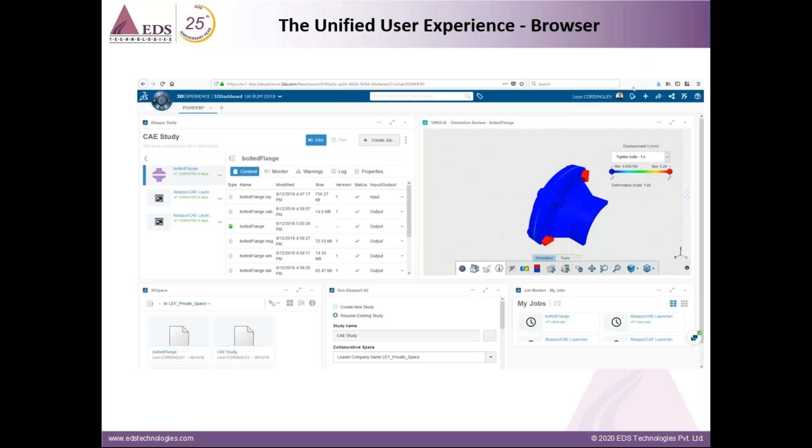So this is how the unified browser is going to look like. Either you can launch it through the 3D Experience which is installed on your laptop, or you can use the browser application as well to log in and build your models and submit it for the analysis. So that's how easy and simple it has been made.

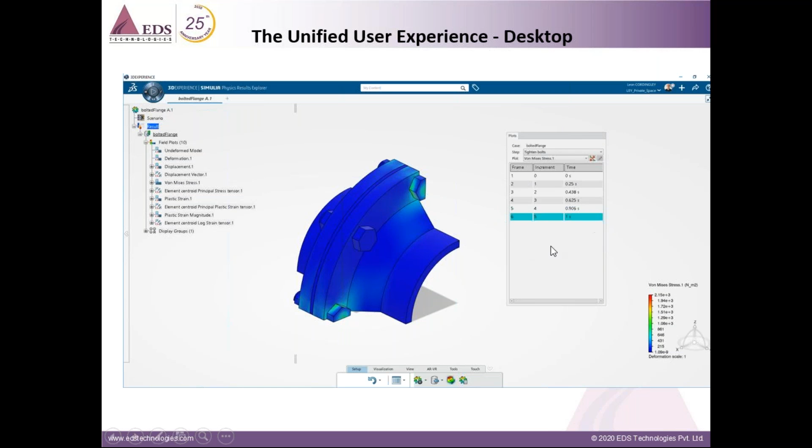So once I go into a particular application, this is what the user interface is going to look like. And like I mentioned, you will see the model tree on the left hand side, a toolbar at the bottom, the search bar and tags on the top, as well as this table you are seeing. This is the intuitive tabular table that allows the user to perform his duty without making any errors.

Now, what is my role in all of this? Like, okay, I am a simulation engineer, true, but I am working only in a particular department for a particular kind of analysis. So what is my role in all of this? Basically, one of the most important points here is functionality is provided through roles.

We do know that every organization has different kinds of specialists. So based on their experience and specialization, we can assign different roles to those particular engineers. If I'm a mechanical analyst, or a simulation specialist, I have a mechanical analyst role that can be assigned to me. For a designer who is building a design and quickly wants to validate if his design is good, a stress engineer role can be assigned. For a composite specific engineer, we can assign composite simulation engineer. Then there is additive manufacturing researcher, plastic injection engineer, and many more roles are available. And at the end of the session, we'll briefly talk about structural analysis engineer, which is a full Abaqus capability role, and we will definitely focus on this role shortly.

Now, each role here describes a typical user's profile, and it provides the capabilities and all the tools for them to do their job. And not only that, users can have one role or a combination of roles, and you can assign as many roles as you can. And one more good thing here is you can assign an administration to the platform, and all the roles will then be assigned by this platform admin. And all these roles are accessed via the compass, which I previously talked about.

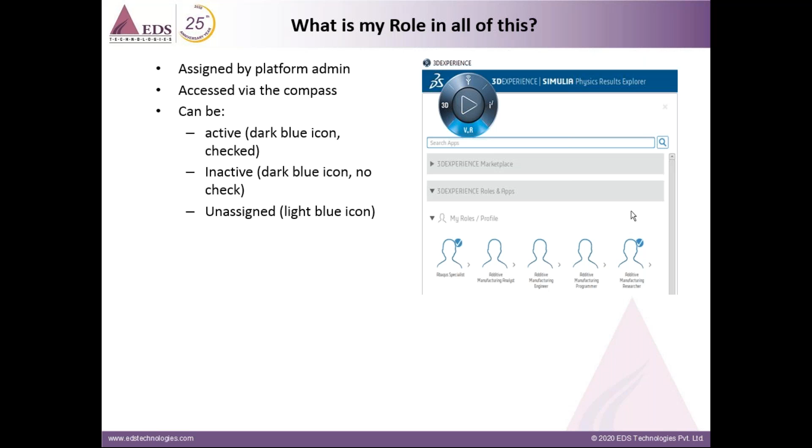So V plus R is for simulation. When I go to 3D, these are all for the CATIA or the 3D product design roles. And again, roles are packages of applications. So inside the roles, you will have different applications, again very specific to the role that has been assigned.

And it's the 3D dashboard. It's your one-stop shop for 3D experience. You can access any and all apps from different brands using the same widget. So it makes the job easier. I don't have to keep moving from one GUI to a different GUI, or start firing up different softwares, so that you can have control. Everything can be accessed from a single widget.

Not only that, you can open up different widgets and interact by using drag and drop. On top of that, you can create your own personalized interface as per your needs. So if you're working, you have a certain workflow which you'll be working day in and day out, say for the next 6 months or 1 year. You can create your own personalized interface which will aid you to fasten your process. A multiple dashboard again makes it easy to switch between different tasks as well as roles.

Now coming to value proposition, first of all we have state-of-the-art multiphysics simulation capability which can deliver structural analysis, fluid analysis, acoustics analysis, electromagnetics, multi-body simulation, all brought onto a single platform. On top of that, we have very high advanced capabilities for pre and post processing as compared to the standalone Abaqus CAE. The meshing algorithms, the load constraints, all these algorithms have been highly strengthened and enhanced as compared to the standalone Abaqus CAE.

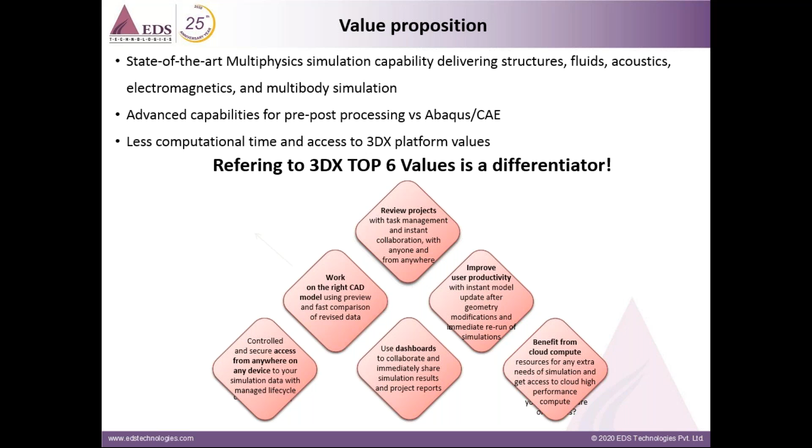Again, I will speak about different types of compute availability within Dassault Systèmes, wherein if I just need very high performance computing for one project which is going to take 10 hours, I don't have to spend a lot of money to buy tokens. Rather, I can buy credits which will be good enough for 10 hours with a very high computing, high performance compute power. So all these different variations of capabilities are available.

Now, coming to another value proposition, the cloud compute example or the turnaround time. As you can see on my screen, there are some examples of the analysis types with the model size, and we have also mentioned the turnaround time when using local compute, meaning hardware compute, as well as the turnaround time for cloud compute.

For wire crimping, a dynamic explicit analysis which involves contact, the model size is about 84 MB, with about 84,000 nodes and 258,000 degrees of freedom. If I use local compute with a minimum amount of cores, that is one core, it's going to take about 26 minutes to complete the job. Whereas if I go with cloud compute, it's going to save me about 5 minutes.

Similarly, for frontal crash dynamic explicit analysis, the local compute is going to take about 204 minutes, whereas the cloud compute is going to take about 178 minutes.

Now, engine thermal stress implicit analysis with minimum local compute is not possible on a single core. Whereas with the minimum compute on cloud, it's going to take about 120 minutes to finish the engine thermal stress analysis, which is an implicit analysis.

For engine sealing and bore distortion, it's around 429 minutes as compared to 343 minutes when using local compute.

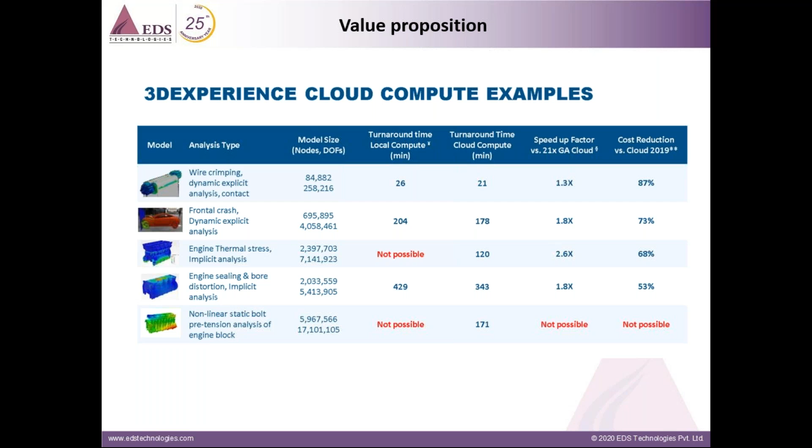So these are some more examples, especially for Abaqus. Be it examples like stent expansion, sheet metal forming, bottle drop, reactor vessel, bolt load, internal pressure, bolt pretension, airbag inflation - this is where we can see the difference in number of cores used on the cloud, and the time the cloud compute takes to complete this analysis.

So for all the small kind of jobs on cloud, a minimum of 18 cores is available by default - you cannot go less than 18 cores. Whereas for medium size jobs, somewhere between 4 million to 8 million degrees of freedom, you get 36 cores by default. And for any models beyond 8 million degrees of freedom, you can go all the way up to 144 cores depending on your requirement and the kind of analysis you are going to run.

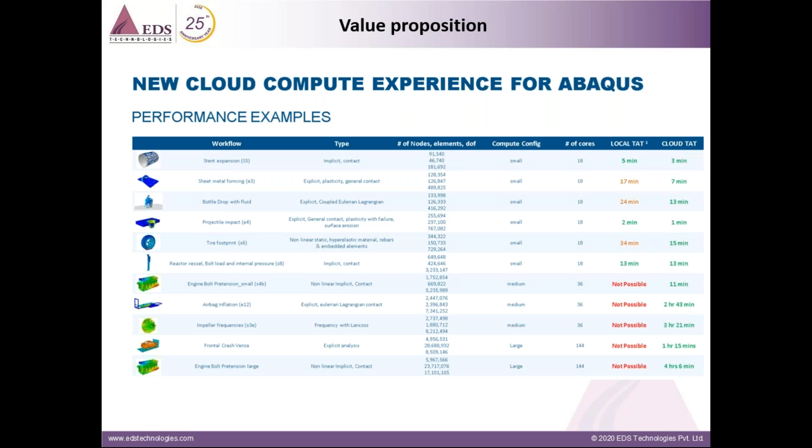So this is the difference when running local compute as compared to cloud compute. Now, this is one small example of how I am going to build a model, or rather pre-process a model, and submit it for analysis. This is a very quick video.

So you have the import option, you can go ahead and import a CAD model.

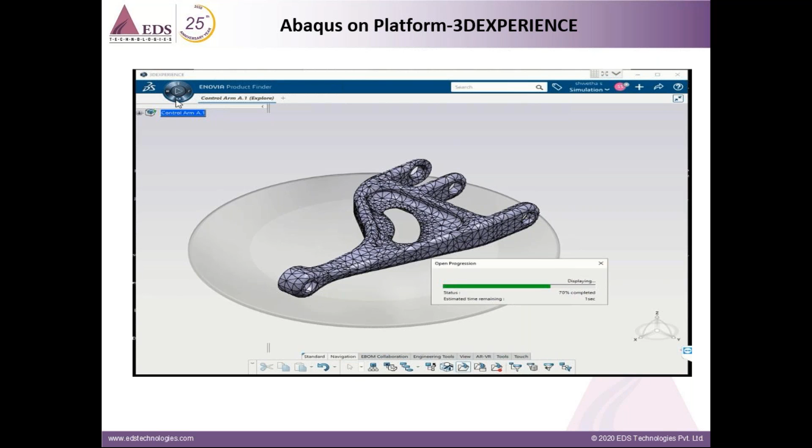And you have all the meshing algorithms just like in Abaqus, and you can see at the bottom we have different tools for modifying these changes. Now you see how we went to V plus R, and I'm choosing a structural model application.

Now once I click OK after choosing, it automatically takes me to that particular application wherein the model tree is highlighted. You have properties, you can go ahead and assign a material. You can either create a material, or if you want certain materials saved, you also have a material palette where you can save your materials once created.

So you can input all your values, you can apply, you can choose the domain, especially what kind of simulation you are carrying out, be it mechanical, thermal, or frequency. All those domains can be easily assigned.

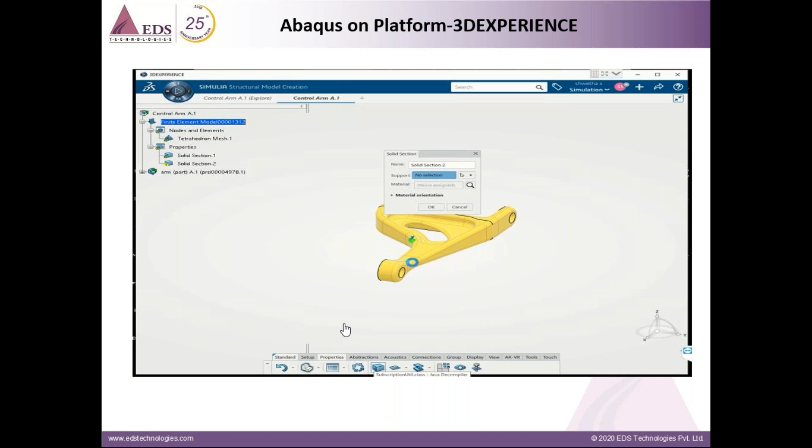So I'm choosing a structural kind of analysis here. Now, once I choose that, you can see how the bottom tools have already changed. So I have a procedure. I can go ahead and create initial conditions, the interactions, the restraints, the loads, and finally, when everything is done, you can simulate it.

Now you can see just above the tools, it says structural analysis case, and before this previous step, the static perturbation step has been created as a procedure. When I click on this arrow, this is the intuitive tab I was talking about. So the setup, the parts, connections, and interactions have all been properly done, hence highlighted in green check mark and square boxes, whereas restraints, load, simulate, and results have not been done yet completely, and that is why those are highlighted in red circle marks.

So now I'm going to the restraints to create a boundary condition. I'm going to fix one side of this particular arm, where we call it a clamp. That is encastre, as we say it in Abaqus, wherein we are restraining all the 6 degrees of freedom. Now you can see the restraints, the green check mark is there.

Now the next step would be to assign the loads. So I'm choosing a face and I'm going to assign the load. I'm going to simply assign a pressure load, or you can even assign force. There are different types of loads available; as per your requirement, you can go ahead and assign. I'm going to assign it on the top surface of this arm.

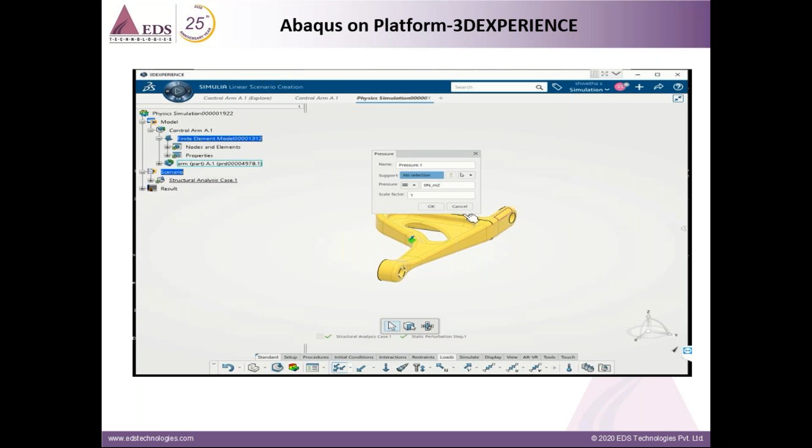So I'm choosing those surfaces, and I apply about 10 Newton per meter square, and okay.

And then we go back to the intuitive tab, and now you can see everything is checked in green mark except the results, because we still haven't done the simulation. So I'm going to submit this job, or rather simulate it.

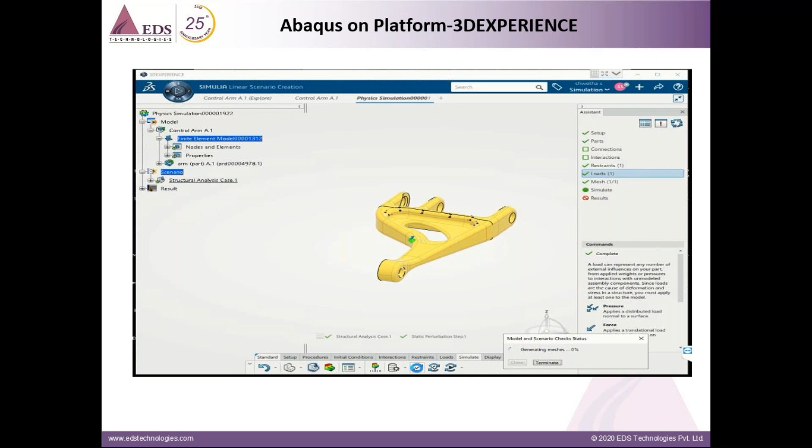So the job is running now. You can see if there are any errors or warnings, they will all be displayed over here. It will take a few moments to finish the results.

And then once the simulation is completed and done, we can go ahead and visualize. So I'll quickly move this.

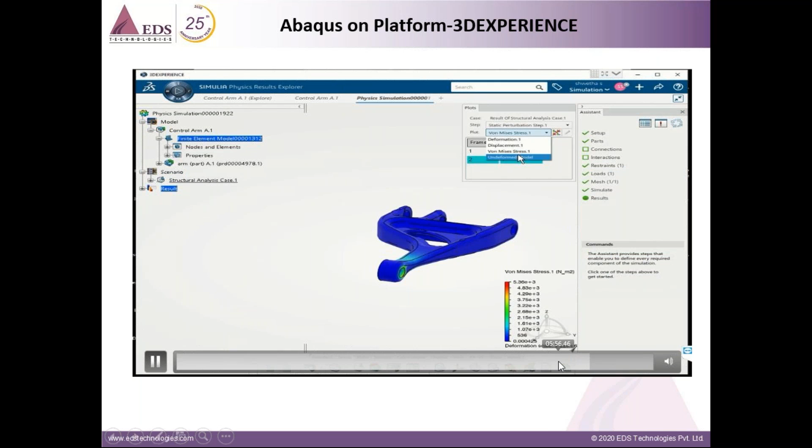So this is the visualization window, and you can see, you can check for your von Mises displacement, undeformed, deformed state, etc. You can have cut views. We will look into the visualization tool in more detail in the upcoming slides.

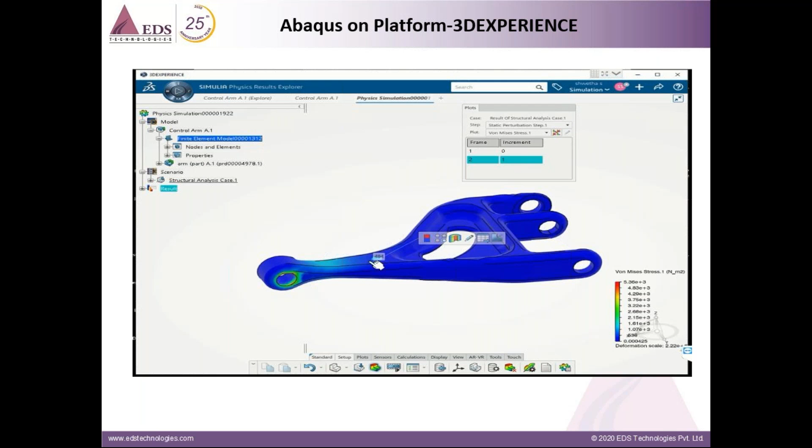So in short, this is the procedure wherein I can import a CAD model onto the 3D Experience platform, use the available tools to toggle from one task to another very quickly. We can build the models, mesh it, and submit it as seen over here.

So I'll move on to the next slide. Coming to the visualization part, many customers today are finding that CAE is not really able to manage the size and complexity of the models they produce. Fundamentally, Abaqus CAE is a single core only application, and so fundamentally, it is limited.

Now, post-processing in 3D Experience can be an enabling technology especially for these users. Native apps available on the 3D Experience platform support multi-core, allowing result sets of tens or hundreds of GBs in size to be post-processed effectively. In addition, the architecture of the high-performance visualization allows much of the heavy lifting to be done on the server, that is the cloud, with local resources used only to display the graphics primitives.

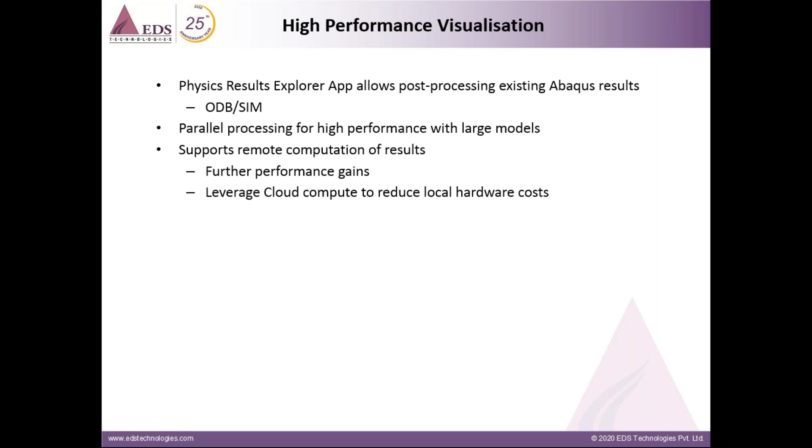It is also possible to import legacy ODB or SIM files into the 3D Experience platform. So if you have any ODB or SIM files, even those can be imported for post-processing, making this an attractive option for many users today.

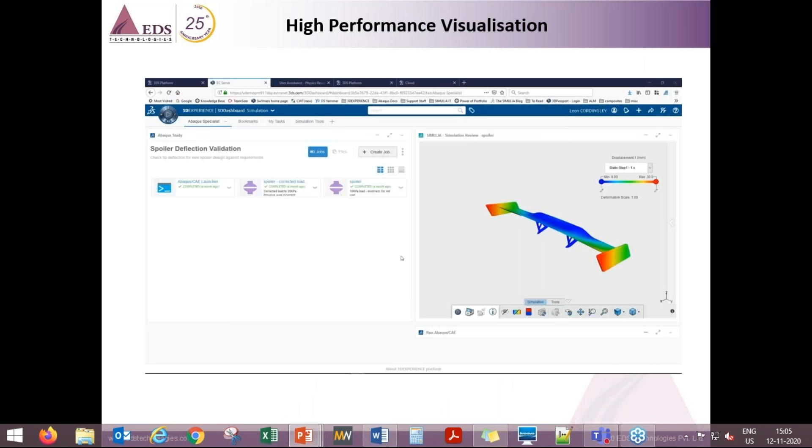Now, this is one quick small video, going back to the high performance visualization. This is a small demo on how the visualization tool works on the 3D Experience platform. So I'll quickly run through this.

So this is what we are visualizing in Abaqus CAE, or the standalone Abaqus. Now the same file, when visualized on the 3D Experience platform, you can see how the visualization effect has been enhanced, and how it has become easier, not only to load the models, but also to have different sectional views, probing views, report generation, etc.

You also have the chance to save your file either on the server or onto your local directory if you are using it on cloud.

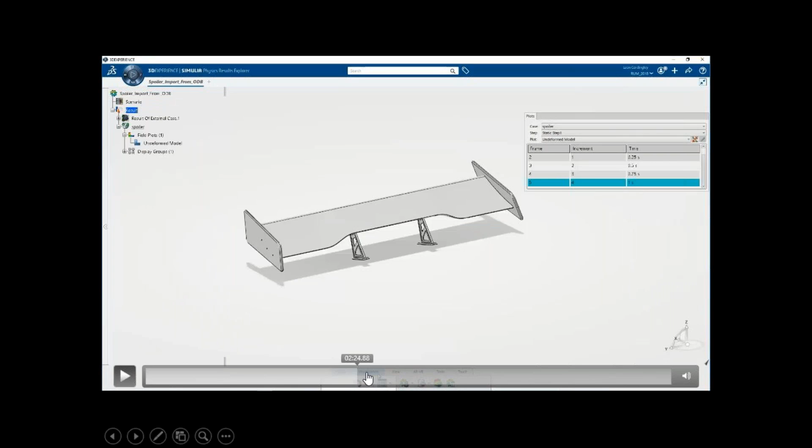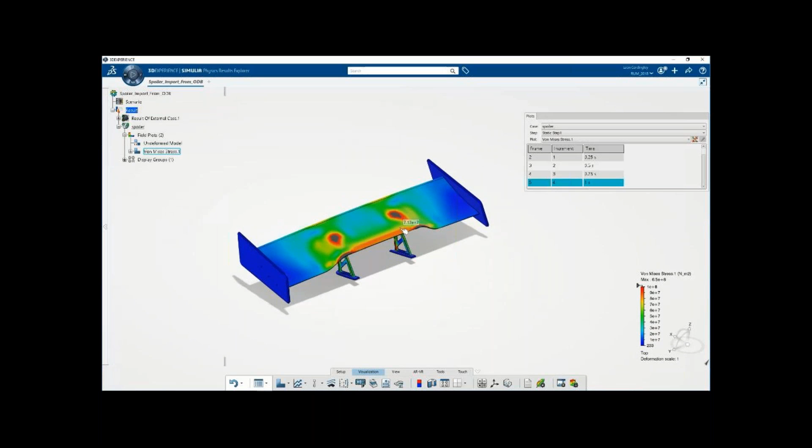So this is where I can choose my frame. I can even choose the increment, choose the plots, and check out my values by inputting it. It's a very seamless set of tools that are currently available, specifically when it comes to visualization.

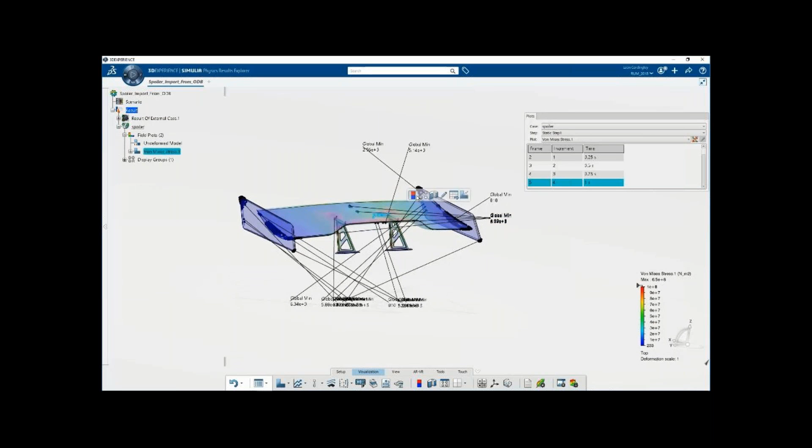And all these additional advanced tools are available to check out the global minimum stress values, the global maximum stress values, on which element these values are acting, and how they are acting. All this can be highly visualized here. And then we can also have the cut views, so you can have the cross-sectional views to see how the stresses are acting.

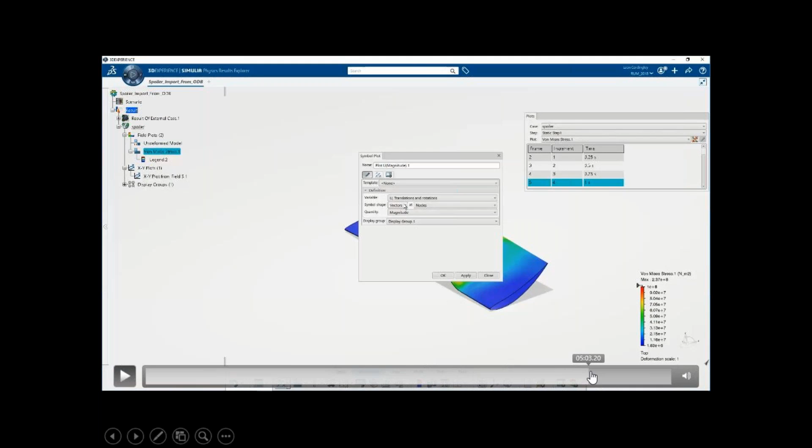These are the plotting of the graphs, plotting of vectors, that is the magnitude of displacement that it is going through. So basically that was just a small gist of the visualization tool.

Now coming to 3D Experience Cloud, which I did mention at the beginning, we offer different kinds of cloud services. There are three different kinds of services that we currently offer. One is software as a service, wherein only software will be provided to you on cloud, where you will be pulling up the licenses from the cloud, but running the jobs on your local machines.

Then there's platform as a service, where the whole 3D experience platform will be given to you as a service with an option to run either onto the cloud, or you will still be running it onto your on-premise hardware. Whereas infrastructure as a service is all you require is a simple compatible device wherein you can install your 3D experience, or you can go to the browser and open up the 3D experience. So all your model building, your data submission, everything will be completely done onto the cloud.

So this is what we are talking about with infrastructure as a service, wherein there is no maintenance for your software required, no maintenance of your hardware, because there is no hardware requirement apart from a basic laptop or tablet, wherein you can log into your 3D experience platform and start working. On top of that, every 24 hours maintenance on the cloud happens automatically. Any software updates, any additions, any enhancements will happen automatically every 24 hours on the cloud. You don't have to worry about any of these maintenance issues, because that will be taken care of.

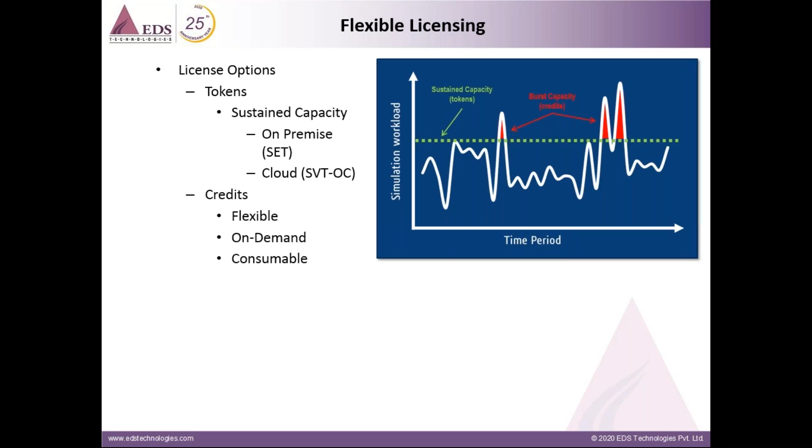Now, a summary of the 3D experience platform: it's a complete all-in-one cloud workflow. It can be either through software as a service, platform as a service, or infrastructure as a service. And you have immediate on-demand access from anywhere in the world. As long as you have a login password for your 3D experience, you can be anywhere, as long as you have good internet connectivity. You can log in from anywhere and finish your job.

It's fully scalable and flexible as per your requirement, and its role-based access will help you democratize technology to all departments. If you want to restrict a certain engineer with a certain role, you can do that, so his productivity is doubled because of this. And it has high end-to-end security, fully triple encrypted. So when you opt for cloud, a certain space in the cloud will be assigned to you, whose login and information will only be with you, and not even Dassault Systemes can touch that particular space which has been assigned to you.

So there's high end-to-end security as well. Simulation content here, using the 3D experience platform, can be managed very similar to CAD. Data access can be managed automatically. You can create attributes, manage and share specific content via bookmarks, folders, etc. All this can be done through the 3D experience platform.

Organizing your data again can be done through the 3D experience platform. It provides several options: we have 3D search, bookmarks, folders. You can create your folders, create catalogs, create libraries, share with your teammates, or share only with the persons you want. So all these capabilities are available.

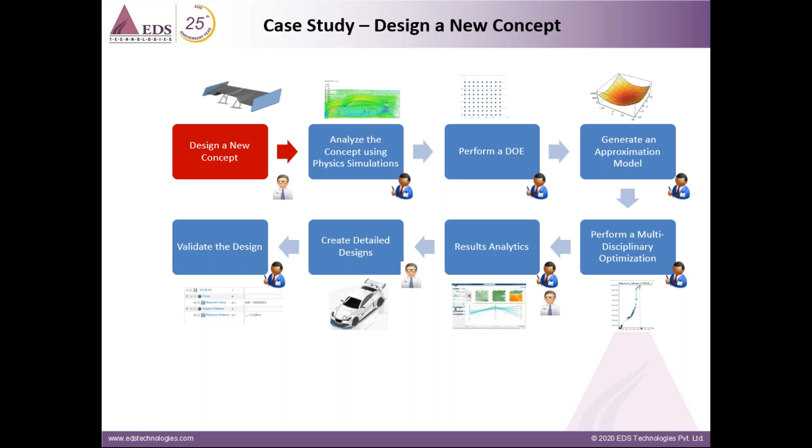This is one of the case studies wherein they have used the 3D experience platform all the way from designing a new concept, analyzing the concept using physics simulation, performing a design of experiments, generating an approximation model, performing multidisciplinary optimization, using result analytics, creating detailed design, and validating the design to get the optimized design. So this whole workflow or work cycle can be easily achieved through the 3D experience platform.

In summary, we have different simulation tools like thermal, structural, fluid systems, multi-body, CFD, etc. When it comes to simulation IP, reports can be generated, requirements gathered, models created, results explored, and templates, formulations, methods, loads, materials, and tests can be created. You can map them to scenarios, and you can create scripts as well as workflows so that you can cascade it throughout your organization.

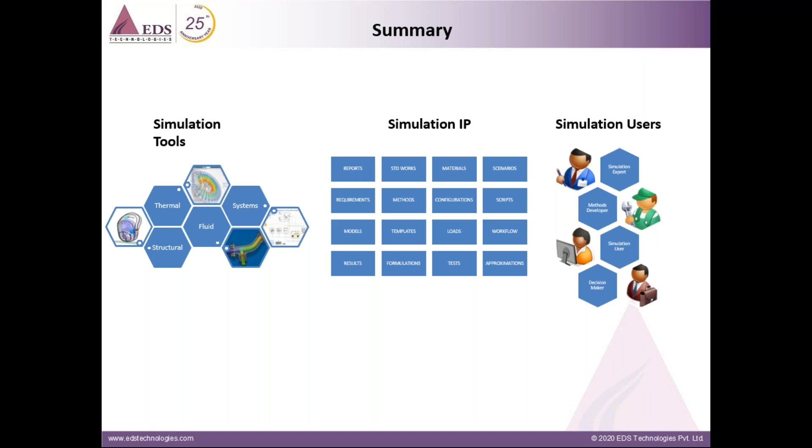Coming to simulation users, again it's role-based, depending completely upon the expertise of an individual engineer. You can assign either regular roles or advanced roles like simulation expert, methods developer, simulation user, decision maker, etc. Now, one of the roles is called the structural analysis engineer, which is a full Abaqus capability. This role enables comprehensive structural simulation, covering statics, dynamics, vibration, thermal, as well as a bit of fatigue across a broad range of industry applications.

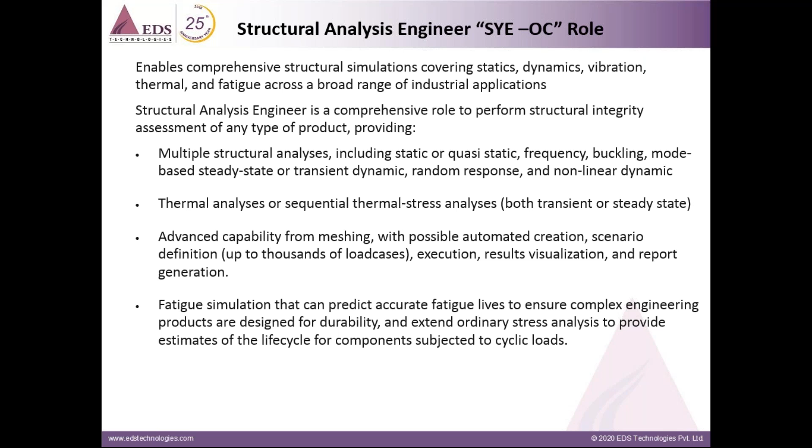Some of the highlights: thermal analysis or sequential thermal-stress analysis for both transient and steady state can be carried out. We also have advanced capability for meshing with automated creation, scenario definition up to thousands of load cases, execution, results visualization, and report generation, all through this role. On top of that, an added advantage is fatigue simulation, which helps predict fatigue lives to ensure complex products are designed for durability.

This is how the structural engineer role is going to look like, the GUI when you open up the structural engineer role and the different tools. Here are some examples that have been currently analyzed using the structural analysis engineer.

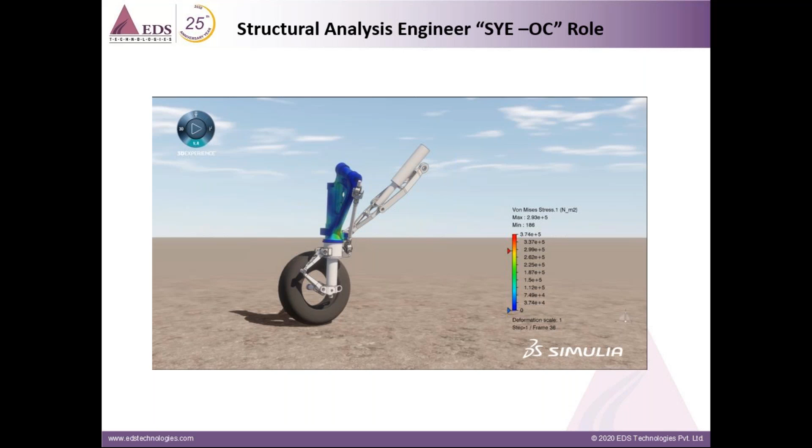So that is all we wanted to give you, the flavor of what the 3D experience platform is and what simulation on cloud is. Because when I go for simulation on cloud, I am going to need the 3D experience platform to achieve the desired results. The whole intent of this webinar was to give all of you a little flavor about how 3D experience is, how it works, what the different roles are, and what the unified experience is.